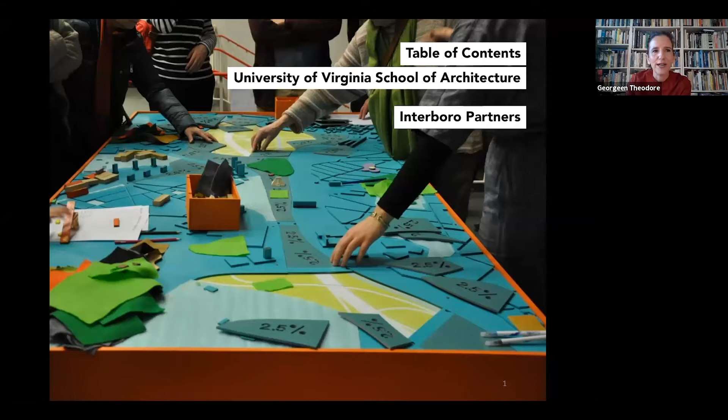So what do we do? As you said, we're architects. Yep, in the second slide, right. Can you guys hear me okay? Everything's good? Okay, thank you.

So we're architects, planners, urban designers with offices in Brooklyn and Detroit. Our projects are almost exclusively projects for the public realm. And certainly the public realm is where the big questions are for architecture at this moment, even if it certainly may not be where the big budgets are for architecture at this moment. But who has access to space has always been the focus of our work.

But with the COVID crisis and the Black Lives Matter movement, questions of who has access to public space, who can safely occupy public space, and even who has the resources to choose not to be in public space have been recast, and now are understood as questions of life and death.

So in this framing, we'd like to focus on two aspects of our work: one, our urban research work, specifically our ongoing project, the Arsenal of Exclusion and Inclusion, and two, our recent design and planning work, which is deeply informed by that research, sometimes in obvious and sometimes in less obvious ways. So we have the Arsenal on one hand, and the planning and design work on the other, two modes of operating: one reflective, investigative urbanism, and one projective planning and design practice.

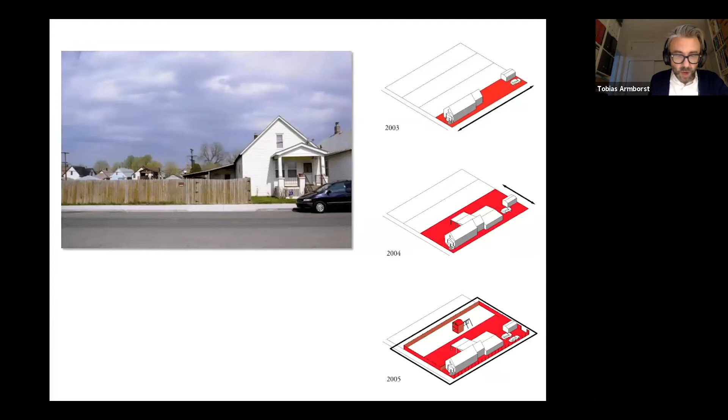And we looked, as Felipe mentioned, at Detroit, the residential neighborhoods, looking closely at what residents were actually doing with their properties. This was at a time when the big narratives about Detroit were about abandonment and the spectacular rebirth of the city downtown, but behind these big stories, hidden or obscured by those larger narratives, there were everyday spatial practices of Detroiters expanding their properties by buying, taking, or borrowing adjacent land, forming new patterns of land ownership and new models of land tenure.

We thought this was really interesting, even though it dealt with small scale and observation, because it spoke to radical transformation of a city, a change of a city's genetic code, a transformation not driven by large design visions or top-down visions, but by small-scale, pragmatic, everyday practices of people working tactically on the ground based on their desires to improve the immediate environment around them.

Practices like that one can find only when operating with a degree of humility and patience, and that was how we operated as researchers here, looking closely, talking to people, listening, suspending judgment for a while to see what people do in a city and with a city, and what we can perhaps learn from it, how people adjust cities to their needs, urban spaces, sidewalks, streets, and how some new spaces and new meaning emerge in the process.

Here's a more recent example, but also from Detroit, another observation in a neighborhood we're working in, namely Banglatown. Here's a small, minimal architecture, a space that transforms what is the space between two bungalows, the building setback, a space defined by zoning codes, here temporarily transformed in preparation for a wedding into this incredibly festive space of entry, a gateway, with the help of really minimal architecture.

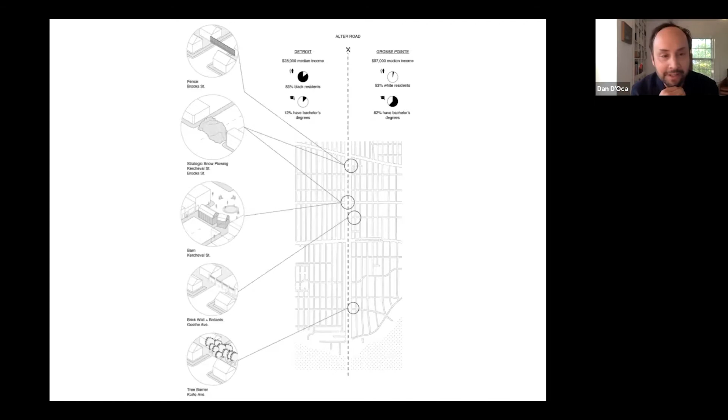But recently, it's actually becoming less and less invisible as Grosse Pointe Park started fortifying this border under the radar, doing tactical things as a means of keeping Detroiters on the left side from entering Grosse Pointe Park, in a way that they won't have to admit to it. For example, the sanitation department moves snow into the middle of the street. There's a lot of snow in Detroit in the winter, and while a giant snow pile in the middle of the street might seem strange, here it is—dumped right in the middle of the street, so people coming from Detroit can't get to Grosse Pointe Park. It's a de facto barrier.

And then the shed, which we saw a picture of earlier, was built right in the middle of the street, like the snow pile. If you ask Grosse Pointe Park what this is, they'll say it's a shed for a farmer's market, part of a plan to create a more walkable community that appeals to young white-collar professionals. So here it is from the Grosse Pointe Park side—you were just looking at it from the Detroit side. The idea was to put a farmer's market in there.

So this is what it looks like today. It's kind of interesting how things that people can't be against, like a farmer's market, fresh food, or art—this is actually what it looks like today. There's a lot of controversy around it, and they had to take down the shed, but they were still able to keep the street narrow and put this kind of public art piece there.

So it's amazing how these things like art, public space, and fresh food are kind of weaponized, right? They acquire new meaning and become weapons of exclusion. It's a good example, I think, of the pathetic but also kind of creative ways in which people try to make walls without having to be so explicit about it. Not that you need to be under the radar these days, but we'll talk about that in a minute.

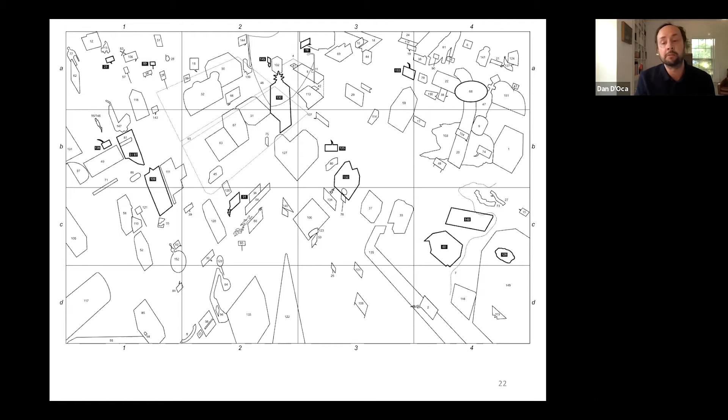So I think we have 163 weapons in this book. They're all hidden in this illustration. And in the book, we look at how they've been used by different actors in the United States to either restrict or increase access to urban space. We also speculate about how they might be deployed or retired to make more open cities in which more people feel welcome in more spaces.

So each of these weapons has a definition and a short article. This is the entire list, or almost the entire list. We edited it quite a bit, but still ended up with 163. They're written by us, some urban historians, practitioners, sociologists, scholars of law, scholars of science.

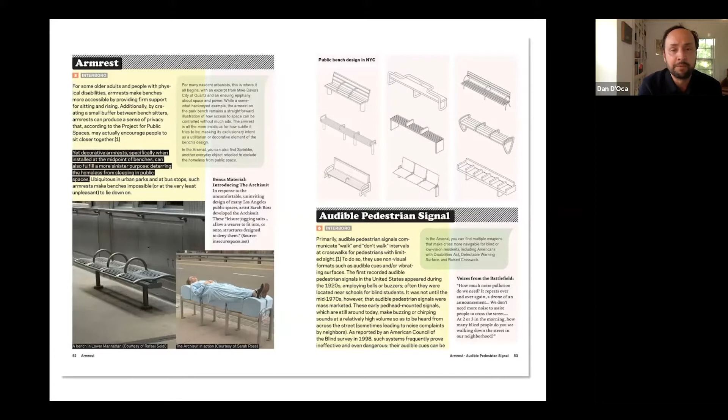But then in the book, there are also counter tools, namely those that increase access to the city. There are policy tools like inclusionary zoning, but also newer things like aging improvement districts, community land trusts, more inventive things like this map, which you see on the next slide, made by a group called the Los Angeles Urban Rangers. It's a map that informs people about how to gain access to the incrementally privatized public beaches in Malibu, and so on and so forth.

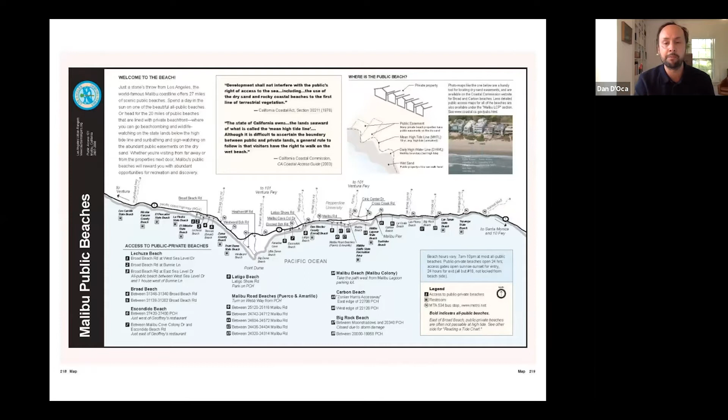Since we started working on this project back in 2008, it's taken on many forms. In addition to the book, as Dan described, we've done a number of exhibitions, conversations, and other publications. The book is currently sold out, but the second edition is on its way.

As we were preparing the new preface over the past couple of months, we were discussing which of the many tools in the book have become more or less important. Many of the exclusionary impulses that were once subtly camouflaged, like the farmer's market that Dan just explained, are now blurted out pretty openly—like, for example, when the president talks about affordable housing in the suburbs and so on.

And like I said before, the question of access to the public realm has taken on a few turns. The COVID pandemic has thrown into sharp relief how vulnerability aligns with race, class, and income. And suddenly absence from public space has become a measure of care for others—it's really flipping things on their head.

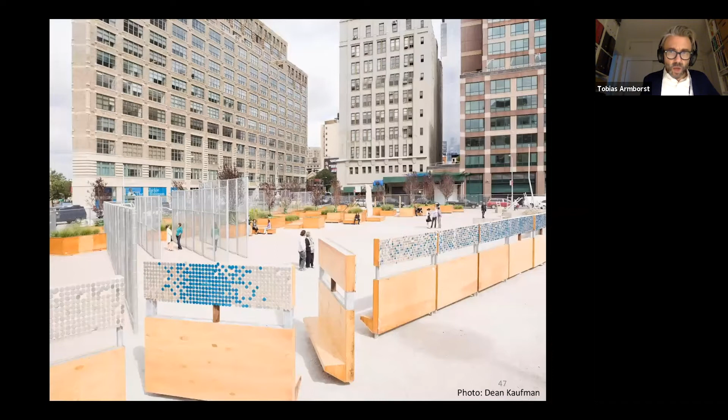There's also a temporary park we did, a rest stop, a small temporary park on the Lower East Side in New York, where we worked with community organizations on an almost non-existing budget, forcing us to make a project entirely out of recycled material and borrowed material, including borrowed trees on their way from the nursery to their final sites.

Similar exchanges went on in Venice, where we made the American Pavilion accessible and created a temporary space for conversation and for play on a tiny budget, by borrowing material from the city of Venice.

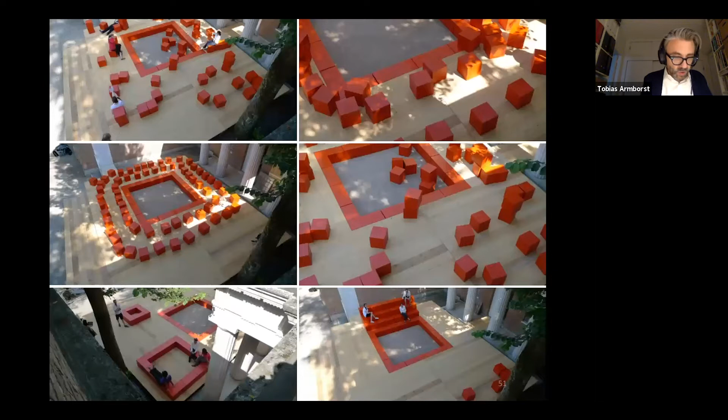You see some of the different constellations here, the play going on, and these are the things that we borrowed from the city of Venice. You might know those temporary sidewalks for Acqua Alta that weren't used during that time. We were able to use that as building material, and in exchange gave seating elements to the city afterwards. These negotiation projects are often necessary, but also interesting in that they set up the project not only as a built space, but also as a process of negotiation.

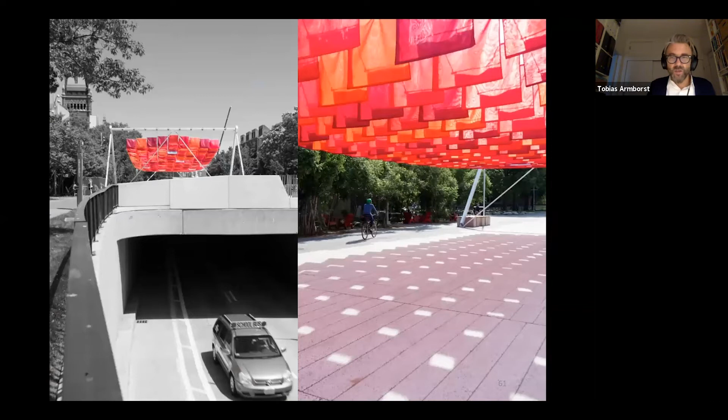Here is a series of experimental public spaces we did for the Harvard campus. We worked with Harvard Common Spaces to set up a series of seasonal spaces, most recently a shade structure that came with the challenge to create the equivalent of tree canopy shade, a filter for the light, without adding additional weight on top of a plaza that wasn't made for this sort of structure, using some of the existing foundations. This was negotiating not so much human actors, but the forces on this site.

Yeah, and this is our most recent project along these lines. This is a very small installation just finished in the South Bronx, where we've been working for the New York City Department of Health. It actually started out as a placemaking study, and we began by talking with many different residents and stakeholders in the South Bronx. We identified a couple of priority projects to improve public spaces that were in line with the Department of Health's mission of improved health by increasing walkability and access to healthy food.

But one of the things we discovered early on in this process, which you can see in this map here, is that many of the residents were extremely vulnerable to heat. In New York City, when we have these heat waves, the indoor cooling centers are really of crucial importance, particularly for vulnerable senior citizens.

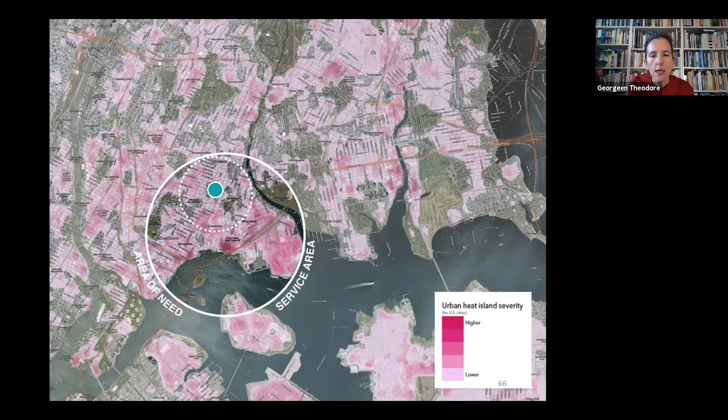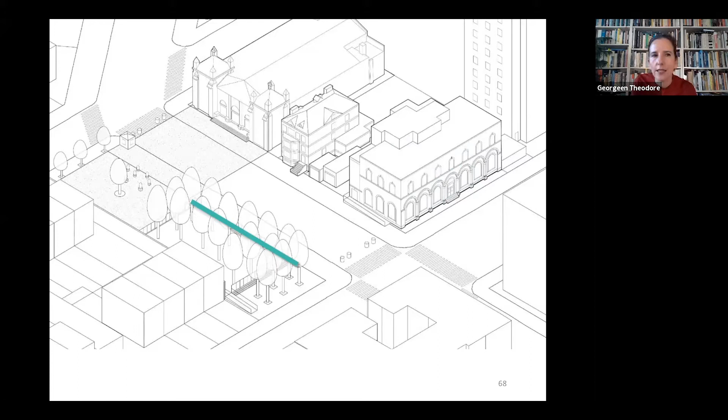During the current pandemic, almost all of these cooling centers have been closed, or they've reduced their capacities, like the one outlined here in blue, at the Hunts Point Library. So as a prototype for a low-tech outdoor alternative to these indoor cooling centers, we've developed a cooling station here in this plaza. You can kind of see it here as this long linear element. It's a 100-foot bench that has shade, movable seating, outdoor fans, and nozzles spraying fine mists of water.

This is the plaza before. This again refers to the kind of observation and empirical analysis that Tobias was talking about, where we saw people were actually sitting on this ledge. Instead of putting some kind of pop-up tent in the middle of the street, we built on those practices that we found there, and bundled all of these different cooling elements along that line.

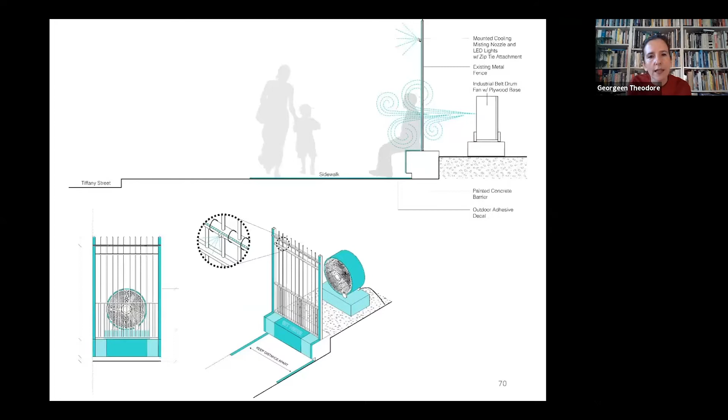So here you can see the bench in section at the top with the fans and the mist. And then you can see it over the summer in action. Here in elevation, it was really heavily used not only by kids, but really a lot by the residents of the adjacent senior center.

But as we're scrolling through these, one thing we want to mention—I think what's interesting about this kind of work really has to do with the negotiations and the acts of exchange that are necessary to pull off a project like this. The whole project becomes a co-creation, something we call co-design, which has really been increasingly important to our practice over the years.

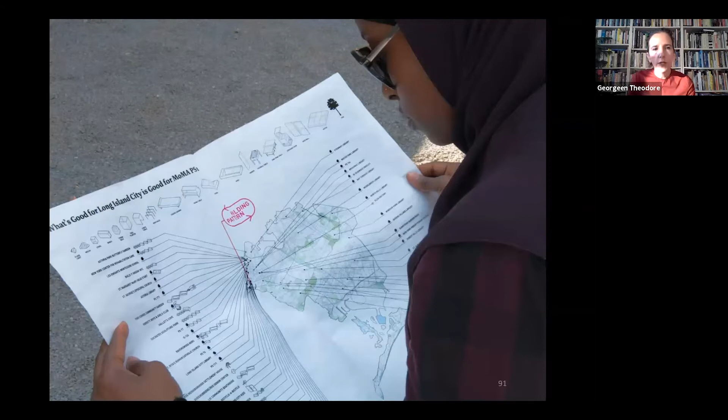The installation was really the result of a conversation with many different people. Importantly, the design itself became a setting for these conversations between people and institutions that typically don't interact. You could call it an architecture of confluence, Felipe, where through the design of the courtyard and through the creative programming, we brought these different groups to the museum—groups that hadn't set foot in the museum before. So this was really an important project for us.

It really was important for us in the way that we think about design with many different actors and stakeholders. Following this project, we increasingly designed places and objects specifically for the purpose of fostering interaction, using our designed interventions to rethink what community outreach is or could be. Not the kind of boring, patronizing, or even extractive community outreach that one sees so often, but really a kind of eye-level dialogue that can bring new actors into the planning process and truly yield new ideas and new architectures.

So since then, we have designed a number of spaces and tools specifically to facilitate these processes, like here in Cambridge, where we worked on the comprehensive plan together with Utile. This is an example of an object we designed specifically as a conversational space: a table shaped like Cambridge, with stools shaped like the city's neighborhoods.

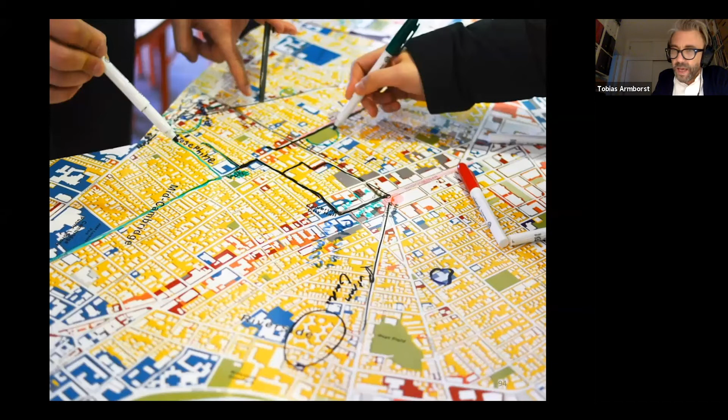A newspaper comes along with that, right? To get feedback, to keep people updated on the planning process, but also to a certain degree to demystify planning — for example, explaining what zoning is and how it works in a fun way.

So those are some of the tools — a couple of games, right? Tabletop games, a corridor game, a right-of-way game. Games are generally a useful tool for people to engage with issues such as zoning and land use planning — concepts that are often cloaked in abstract technical terms, but that don't need to be that way. As planners, designers, and architects, we use so many tools such as drawings and models to develop design together, and the question for us is: can we use those tools also to bring other actors into those conversations?

Here again, the model game we developed for the city of Cambridge to discuss questions of zoning in the context of the development of the new comprehensive zoning plan for Cambridge. It's called the Game of Zones — a name that probably won't reach its expiration date so quickly.

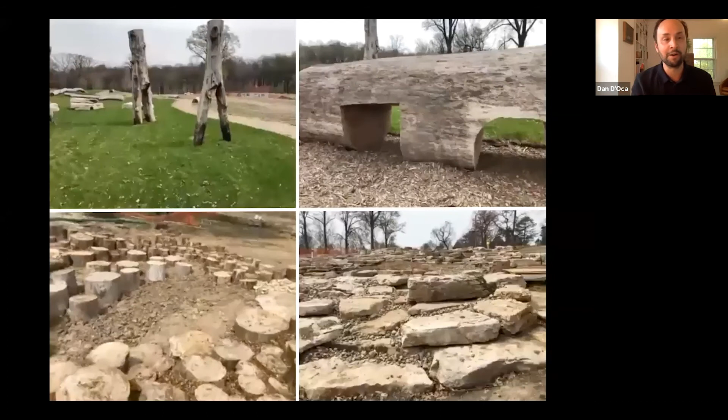This is from our virtual construction management session. You see some of this stuff just being built. We had better pictures, but that'll suffice for now.

And then finally, we designed interpretive signage. Right now we've got kids all over St. Louis learning about these different ecological areas and in turn teaching other kids about them. The plan for these signs is really to just stick them in the ground. They're gonna tell other kids what to look out for, like turtles, or what something might become, or whatever.

It's a big effort, but I think in sum it's really about doing community outreach that's not just about checking a box. It's about tapping into expertise, and it's about multi-voice design.

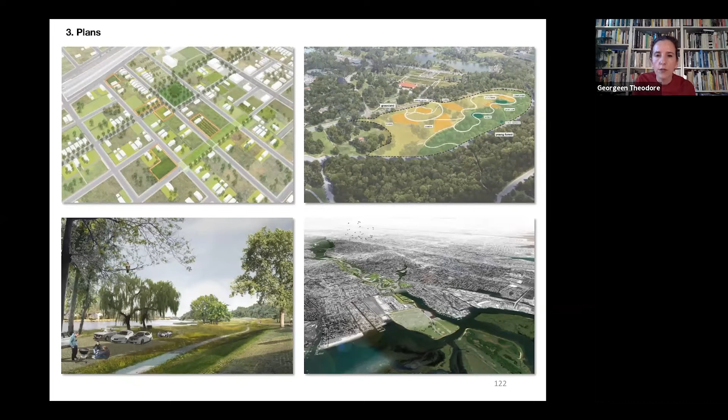So these were some examples of small-scale design projects that were really about the design process itself, opening it up, bringing new actors and new voices into the process, with the goal of ultimately achieving better, more interesting, more complex, more resilient projects based on many different ideas and experiences, but also to harness the design process itself as an opportunity for conversation, for education and empowerment. And so really trying to widen the conversation and open up the process as much as possible, and in that way contribute to public discourse.

And so I want to show you now how that plays out at the larger scale. This is a neighborhood plan, one that's in Detroit.

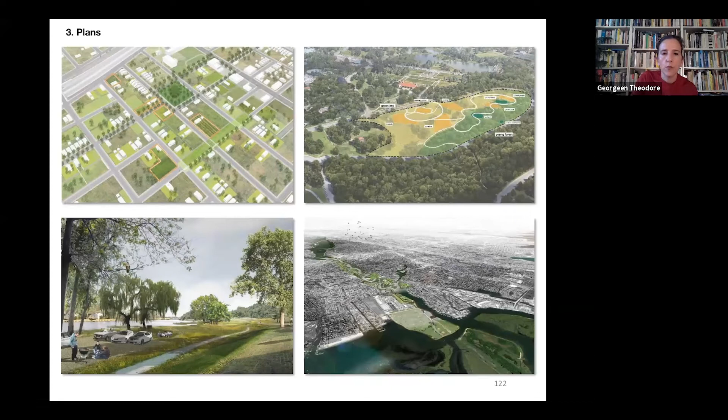This really builds on our earlier work, the Blot project that Tobias showed you at first. Since then, we have been doing a number of different projects for the city, for the PDD, the Planning Development Department. The project I'm going to show you now is the Campau Banglatown Davison neighborhood plan.

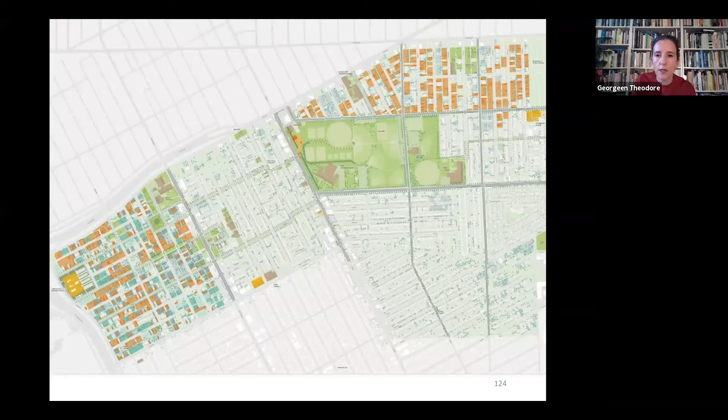This is a neighborhood, or you could call it a collection of neighborhoods in northern Detroit, marked by stark discrepancy. Some parts have a lot of vacancy, which you can see in the upper right and lower left in the orange and blue areas. But in other areas, like in the middle, there's a lot of reinvestment and development, much of it driven by the Bangladeshi immigrant community. Initially, some Bengali immigrants came to this neighborhood from Queens in New York a couple decades ago, and now it's really the place people want to go when they arrive from Bangladesh, because it has all the commercial, religious, and support infrastructure to support you every day.

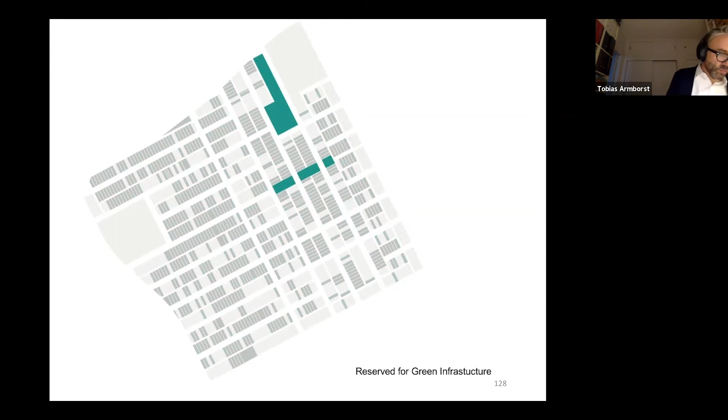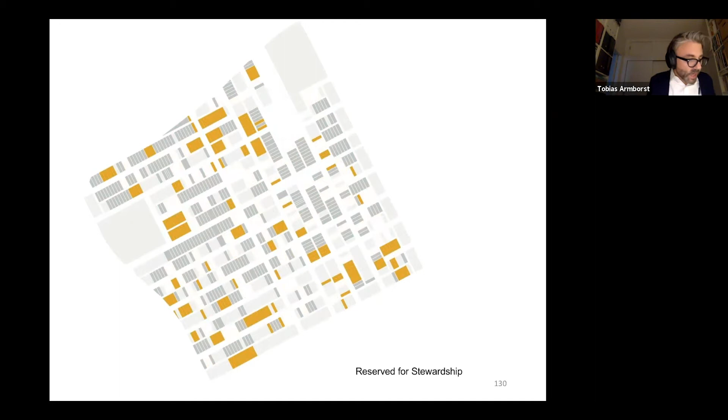So we proposed a kind of patchwork of approaches: areas that are sites for future green infrastructure the city should hold for future infrastructure projects; reserve parcels that are plots where residents have taken on land next to their homes; reserve land that is currently stewarded, meaning someone is taking care of it in a light way without owning title to it; and fourth, bundle the remaining parcels together and sell or give them to groups in the community that require larger bundles of land.

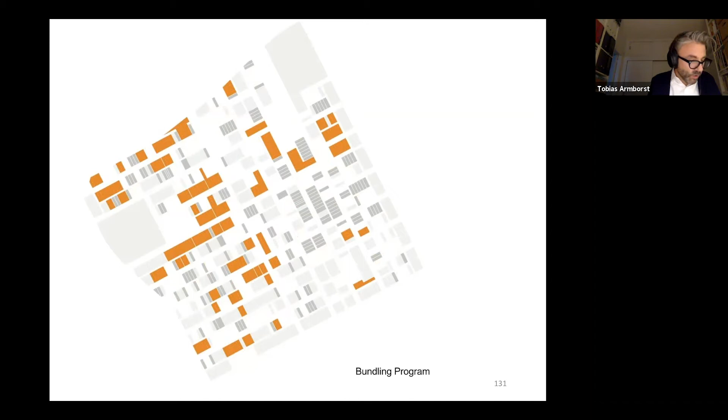So you see the inventory of those resulting parcels. This is sort of the patchwork of approaches, but those larger bundles are really useful for organizations that are working in a neighborhood like this one.

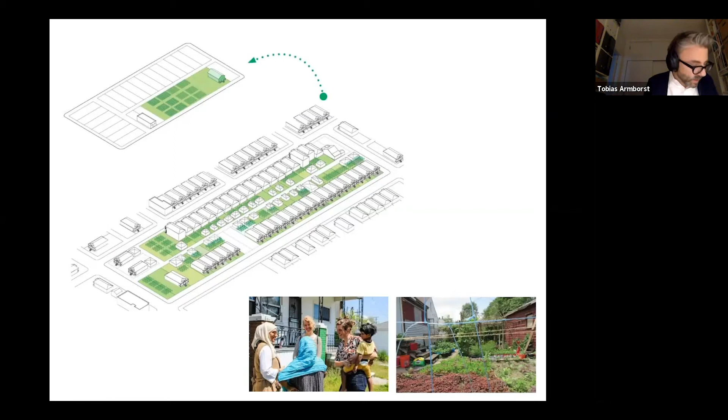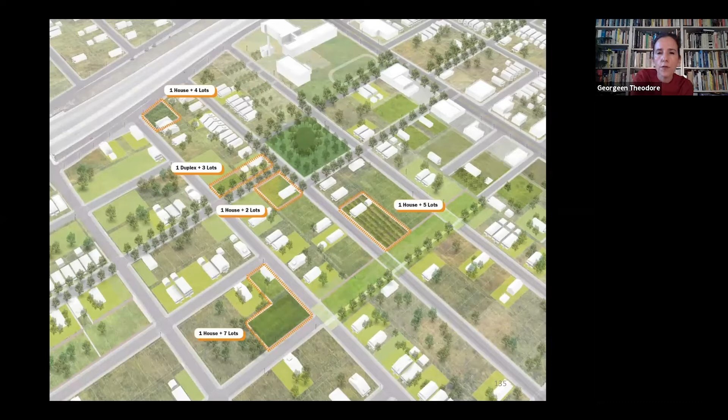These are community groups that have a real stake in the ground, and they'll benefit from this bundling program. But we can also find here a lighter form of land tenure, one that's less permanent, characterized more by use value than ownership, like seasonal use, care, and maintenance.

These are the remaining residents who are taking care of vacant land outside of the territory they own. They mow the lawn, clean up trash, sometimes grow things like Moten here. They do this maybe because they have some interest in the land further down the line, or maybe they're just being good neighbors. But our position was that they should have some stake in the future of the land.

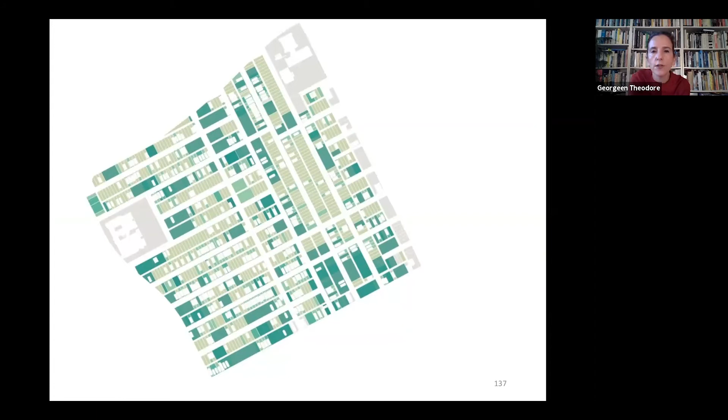As Tobias showed, it's really prevalent. If we zoom in here and look at a detail, you can see that Marty has a lot, but he also takes care of the Detroit Land Bank lot next door and across the street. So what you see here are the clear boundaries of property becoming blurry, and another form of land tenure is introduced, a kind of informal 'land tenure light.'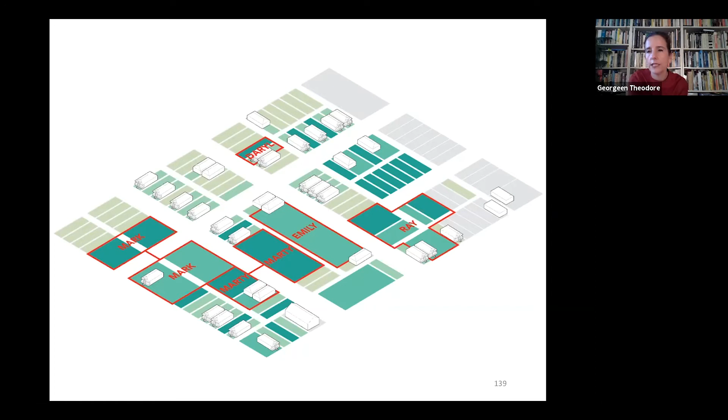Because this form of land tenure is informal, you can't find it on a cadastral map. The city definitely doesn't give it to you as a GIS layer at the beginning of the project, but you also can't find it by looking closely the way you can see lots. The only way to get this information is by talking to people, acquiring local knowledge in meetings. We had many, many meetings, focus groups, smaller meetings such as women's meetings, model building, and game sessions.

But we also had conversations in more informal settings. This is not a table, it's an ice cream truck, but I think it does a similar thing. We had it doing rounds in the neighborhood over the summer, and it doubled as a neighborhood map and an engagement station, a conversation starter, where you could say we're trading ice cream in exchange for information. We chose the ice cream truck as a medium because, like so much of Detroit, this neighborhood is really spread out and car-based, and the ice cream truck is a familiar, ubiquitous piece of urban infrastructure, a mobile setting for conversations, exchanges of ideas, and ice cream cones.